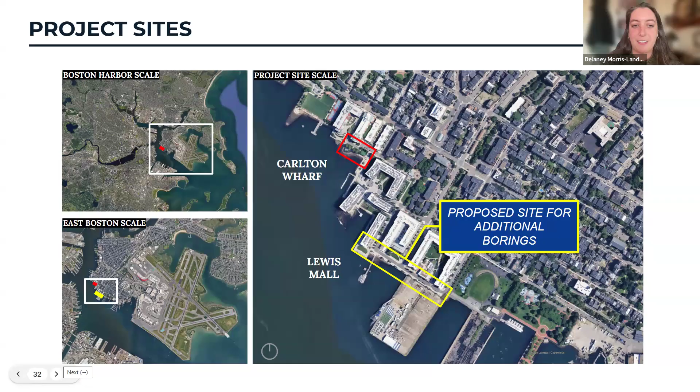Good evening, Commissioners. We are coming to you tonight to ask for the NOI for our additional borings at the Lewis Mall site. We previously have come to the Commission for borings, and these are 2 additional ones in the yellow box you can see on this image here.

This project at Lewis Mall and Carlton Wharf are both for near-term flood pathways into the East Boston neighborhood. There is an additional entry point along the Border Street area, and the convergence of these pathways poses immediate risk to critical infrastructure such as the Sumner Tunnel and the MBTA Blue Line.

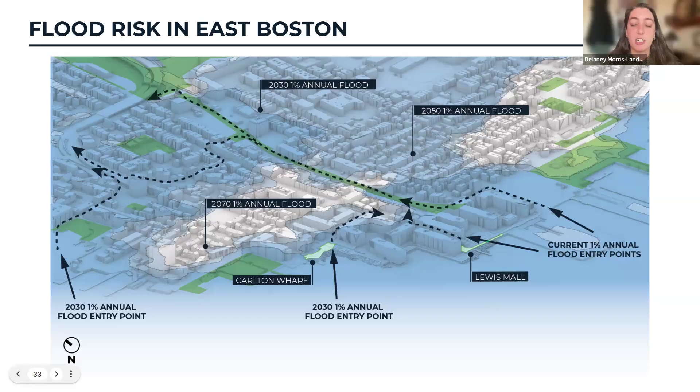This area sees a 10-foot tidal swing every day, twice a day, which is very unique to this area of the world. When this land was filled and created, it was done so when the land was higher than these tides, before we understood storm surge and sea level rise. Recently, storm surge and high tides have caused flooding in this area. If you live in this neighborhood, you've likely seen this flooding during big storms on Lewis Street. This is an immediate issue, but we want the solution to also have benefit in the future.

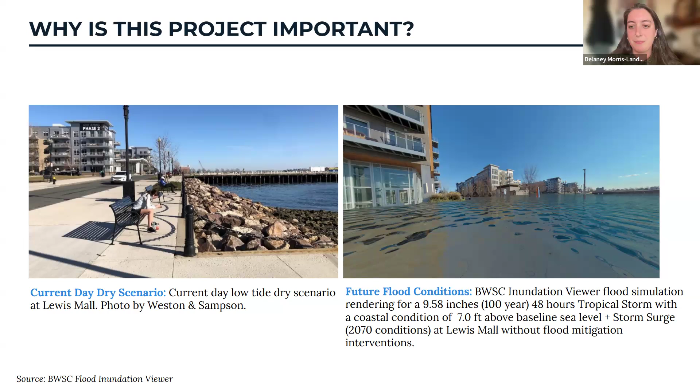To further set the context, we have a variety of considerations shaping the work, including adjacent private property owners such as the Mark, Clipper Ship, and East Pier, all set on a landscape of previous waterfront industrial land created from fill in the 1800s and 1900s. Running below Lewis Street is the Blue Line Tunnel, which means we need to think about how much weight can be added. There is also a water taxi service to downtown, and finally, most of the storm drains from the neighborhood connect to pipes and outfalls that run underground through the project area and outlet into the harbor here.

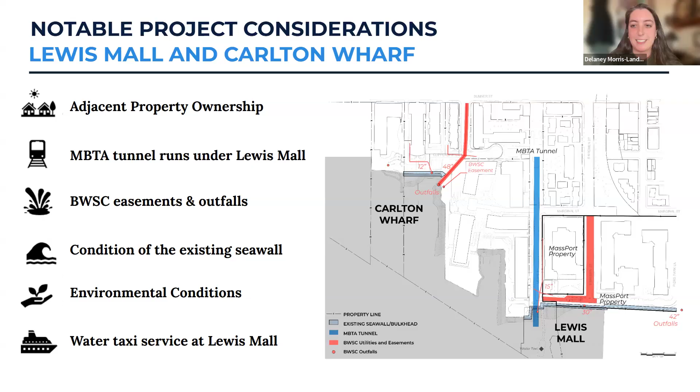So really quickly, we can go through a couple of existing conditions. As mentioned earlier, here is a photo of coastal flooding from 2022. This photo is real, and in the photo on the right, you can look heading east along East Pier Drive, where the elevation rises up and then dips back down again before meeting Piers Park Phase 2.

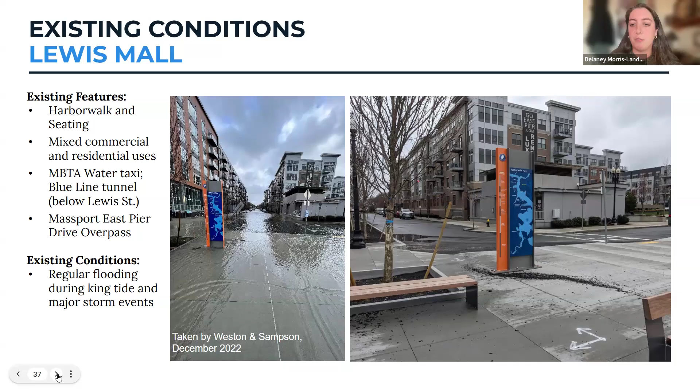Looking at the aerial at low tide, you can see the overpass area we are looking to target for the additional borings in the top right corner. The overpass consists of a pile-supported concrete deck integrated with an internal pile-supported concrete bulkhead wall. This bulkhead wall was backfilled to create roadway access, effectively closing off tidal flow to the interior area. Stone revetment, riprap, was placed along the base of the bulkhead to provide scour protection.

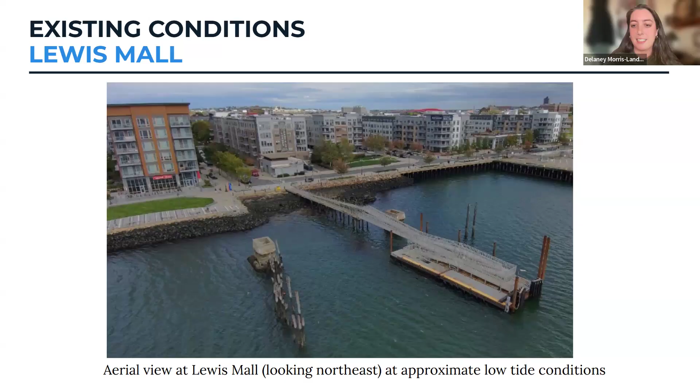This area and Carlton Wharf have very large tidal swings, as mentioned earlier, with very high and low tides. Currently, when a storm occurs at high tide, water is seen overtopping the edges of the harbor walk.

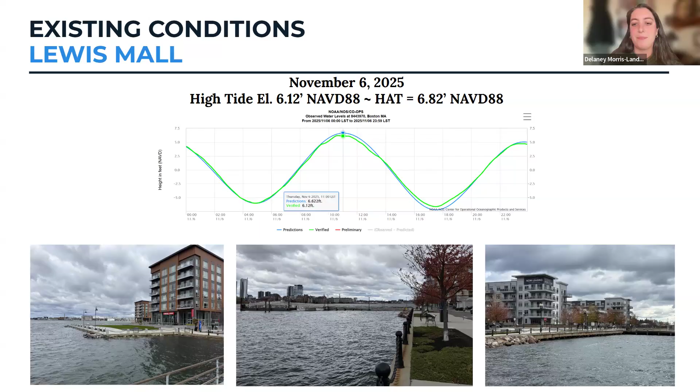The proposed additional borings at Lewis Mall along East Pier Drive overpass are required to advance the project design. We need to get a better understanding of the structural concerns about the soil beneath the water if building on the overpass, as well as the state of the fill. Now I will pass it to my colleagues at Weston and Sampson to speak on behalf of the borings.

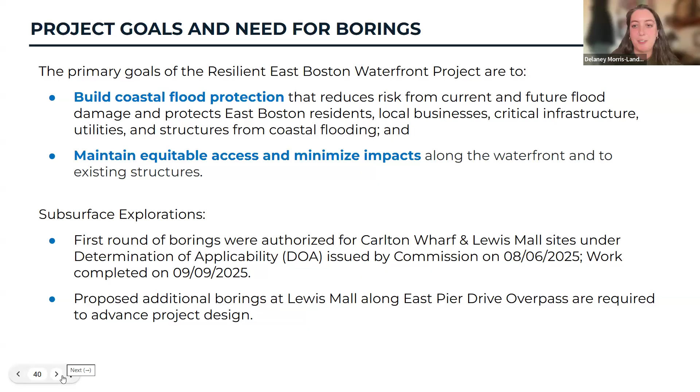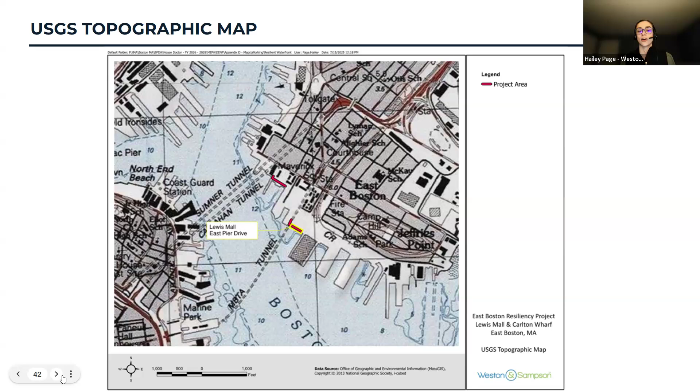From here, as mentioned, this project is located within land subject to coastal storm flowage, which is associated with the flood zone. Within the site, there's a zone VE located at elevation 13, NAVD 88, and there also is a zone AE, which is located at elevation 12, NAVD 88.

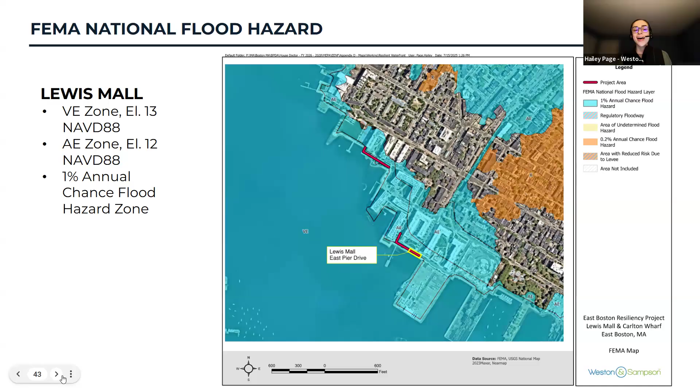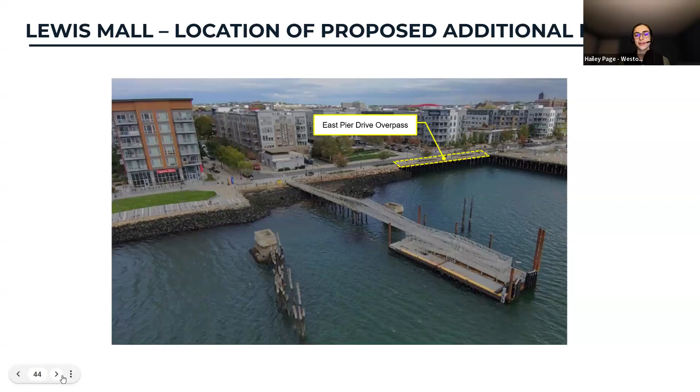These 2 subsurface borings will be performed through the overpass deck along East Pier Drive. These borings will be located both within land subject to coastal storm flowage and within land under ocean. Appropriate sedimentation and erosion controls will be placed around each boring during the extent of the work and removed upon completion. Following the advancement of each boring, the boreholes will be restored to pre-existing conditions to the best extent practicable, depending on whether they're located within concrete areas or within the planters.

It is proposed that the borings take place within the planters, but if there are reasons where they're unable, you'll see on the plans we show a little bit later that we also propose alternative locations if needed, due to different dig safe identifications, or if there's any restrictions for the boreholes to be able to get through.

The boreholes will be backfilled with the soil cuttings as much as possible, and any excess soil that cannot be placed back down in the borehole will be drummed and stored separately in designated areas provided by the City of Boston, and disposed of in accordance with all local, state, and federal regulations.

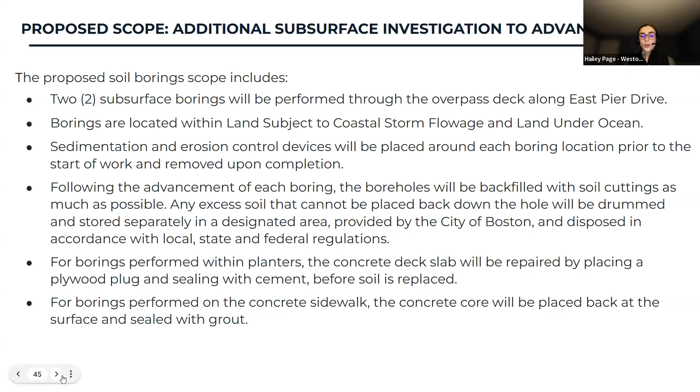Okay, let's move ahead to the next slide, please. Speaking specifically to impacts, our impacts calculated are for both the proposed boring location and alternative, just to be conservative here. So we are proposing 0.8 square feet of temporary impact to land under ocean. This is associated just with the boreholes to get down into the sediments.

And then within land subject to coastal storm flowage, we're proposing 36 square feet of temporary impact. This impact area is a little bit larger due to the proposed erosion and sediment controls. All impacts will be temporary in nature, as I mentioned previously, and restored to the best extent practicable to pre-construction conditions. There will be no impacts to the 25-foot waterfront area, coastal beach, or coastal bank.

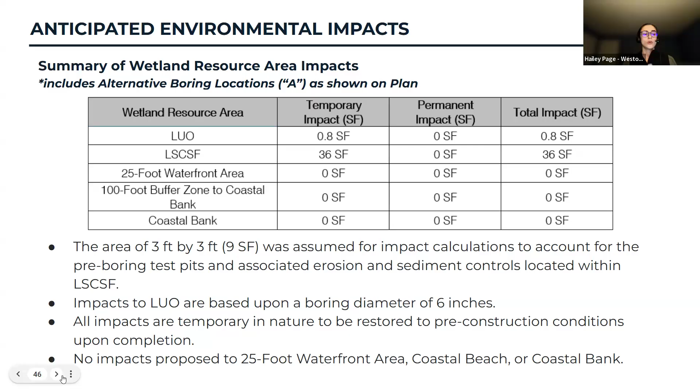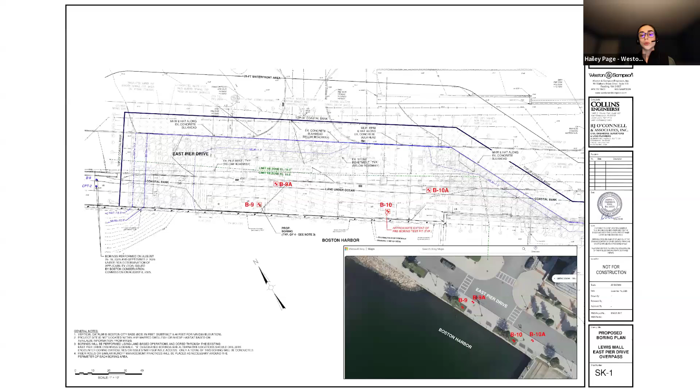Move ahead to the next slide, please. So just quickly throwing up this plan that I was referring to, you see that there are borings B9 and B10 along with B9A and B10A. The borings labeled with the A at the end are the alternative locations, if the proposed landscaped areas are not accessible. Please go ahead to the next slide.

And that's all we have at this point. I'll pass it back over to the commission for any questions they may have.

Great, thank you Hailey. Okay, I just have a couple quick ones here. First of all, want to thank you—when you talked of impacts, the 36 square feet, you included the soil erosion controls. Yep. Usually we don't see that, so I appreciate the transparency there.

Of course. As far as excess soil that is not appropriate to be backfilled, are you expecting any contaminated soils in that area, or is it just a precaution? It's, I believe, just a precaution with the state, local, and federal requirements. We want to make sure that if there are extra materials, we're handling them properly and testing them as applicable. Great, okay, thank you.

And then I have a question for Delaney regarding the wild or extreme tidal flows here. Why is that, and how does that compare to other parts of the waterfront? It is the same really across the waterfront—Boston sees that same 10-foot tidal swing. Okay, that makes more sense. I was wondering if that was idiosyncratic over there.

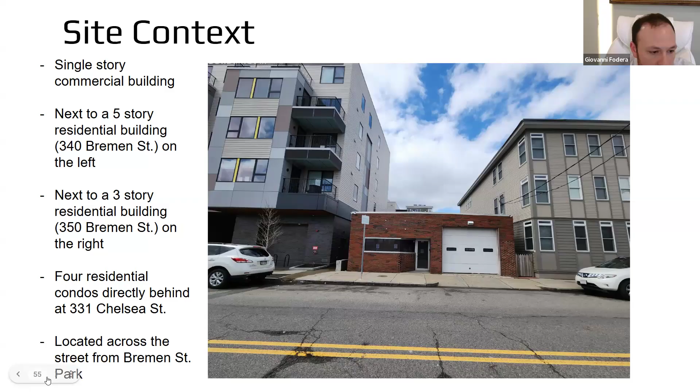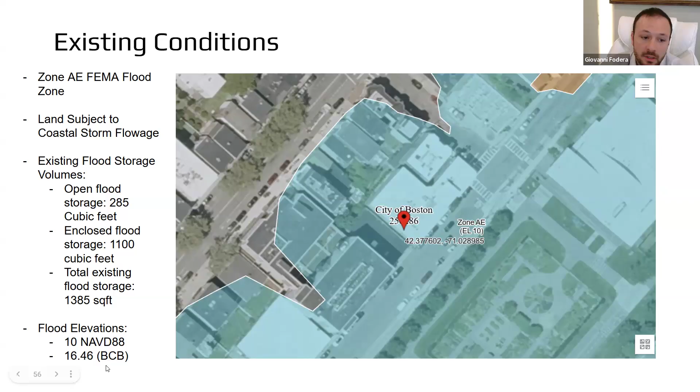The project has been designed to comply with floodplain regulations and improve resiliency at the site. The proposed building elevates habitable space well above applicable flood elevations, and the design ensures flood storage is not displaced and flood flows are not obstructed. In addition, utilities and critical systems are designed with flood resilience in mind.

We can scroll to the next page. From a stormwater perspective, the project represents an improvement over existing conditions. Currently runoff from the site is unmanaged, but under proposed conditions runoff will be captured and treated through a stormwater management system designed in accordance with Massachusetts stormwater standards and local regulations. The system is designed to improve water quality and promote groundwater recharge. We have obtained project approval from the Boston Water and Sewer Commission.

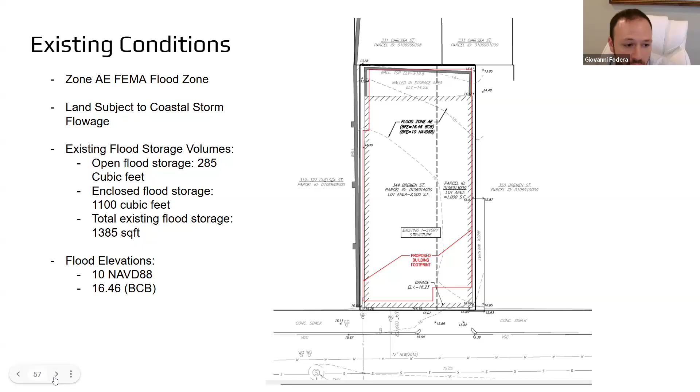Yeah, so it's about over 10 feet above the flood elevation. Flood elevation is 16.46 as shown here on this slide. The utilities will be elevated at least 5.5 feet above the garage elevation. Garage elevation is going to be at elevation 16, so the utilities will be elevated at elevation 21 and a half above the garage floor.

Great. So the ground floor is the garage, so no chance that could be converted to living space. So that's good.

I'll let Commissioners Linné and Wilson talk about the landscaping. As far as I know you got approval from BWSC, so what's your infiltration value here? Are you infiltrating 1 inch? Correct, 1 inch, multiplied by the impervious area on site.

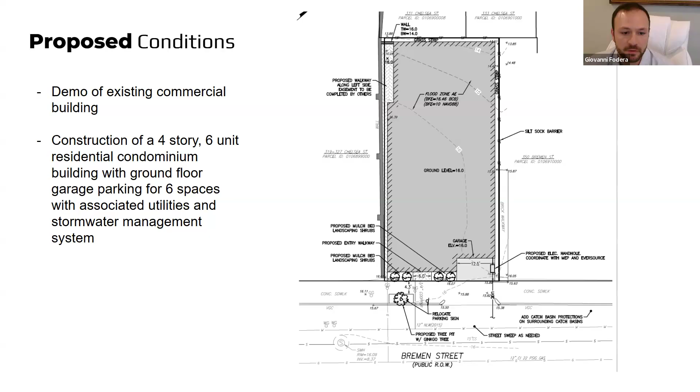Okay, and I see in the notes here that you're going to be putting in light colored materials on the roof. Correct. Okay, I think that's it for me. Thank you for entertaining my questions.

Eleanor, what do you have on this? Thank you. I think the only outstanding question we had was related to the floodplain administrator and whether this project has been reviewed by him.

Other than that, the recommendations we noted include a special condition that the waste on site is disposed of properly prior to construction, that an invasive management plan is provided prior to construction for the knotweed, and a special condition that the roof be light colored materials, which I think should all have been covered in the presentation and discussion since then.

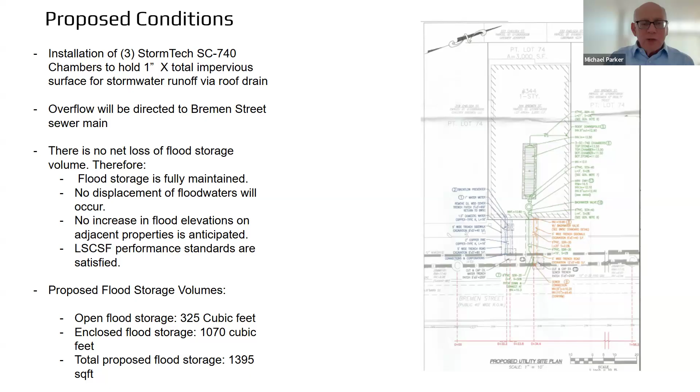I just wanted to point out, I think the Japanese knotweed that'll be in the new building footprint, right? So that disposal is considered hazardous waste and needs to be dealt with properly.

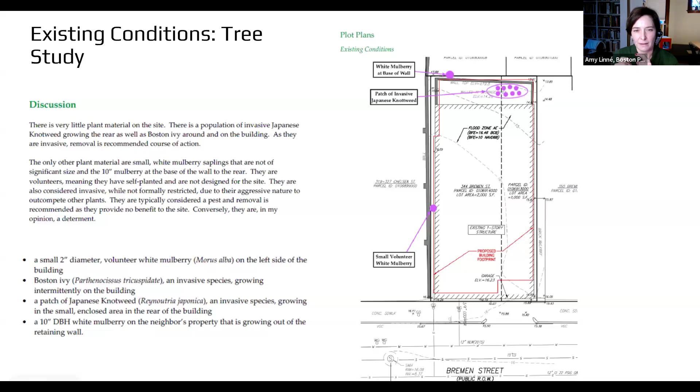I appreciate the street tree addition. I know that comment came out of the Parks Commission, and I saw the details included. I just wanted to make sure that in that detail, or maybe on the next slide with the plan view showing the street trees, the detail calls for sand-based structural soil, so making sure that's described in the plan view, presumably from the width of the tree pit connecting to where those shrubs are.

And I wondered about the watering of that tree, if this building is intended to be condos or apartments, rentals, and if that's part of the property management. Sorry, I'm just giving you all my questions at once. And then last, what the shrub species are, if that's been selected.

Yeah, so I can confirm these will be 6 residential condos. So if it's something we can put as a responsibility with the HOA, I'm sure that's not a problem to water and keep alive. Yeah, as it outlines in that detail, it's really the first couple of years that are critical for those bags to be filled.

For shrubs, Dan, do you care to add anything, any specific species that could work here? Definitely recommend not arborvitaes. I'd have to look at the plans for the elevation to see how big we want them to get, but anything from Japanese holly, maybe, or something that's going to be evergreen but easily managed based on the size constraints there.

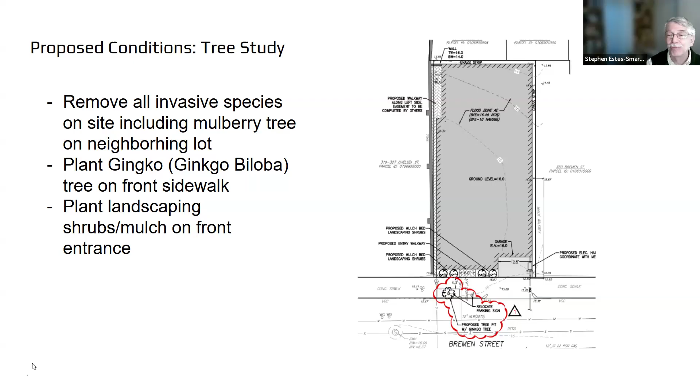Well, it's a foot wide strip, so it's pretty narrow, but we're trying to add as much greenery on the site as we can. Whatever areas we can fit loam and seed is what we're trying to achieve. But a foot wide, you're not going to be able to mow it - someone's going to be weed whacking it. I'm just looking at this photo here.

It looks like your neighbor's got some sort of pavers and gravel adjacent to their building. We are open to using a gravel material as well, just a pervious material - that's what we're trying to achieve here. So if that's preferred - I'm just asking for realism in the end - yeah, if you put loam and seed, it'll just be mud eventually.

Okay, looking at Commissioner Linné to see if she's nodding her head about this little dark slot. Yeah, I think that's practical, to not try to do a lawn there. Pervious is good, and gravel's probably more pervious than trampled soil. We are absolutely open to having a gravel strip instead of a lawn strip. Absolutely, yeah.

You've got pretty much the whole site occupied. That's it for me. Great, thank you. Good thought. Commissioner Herbst?

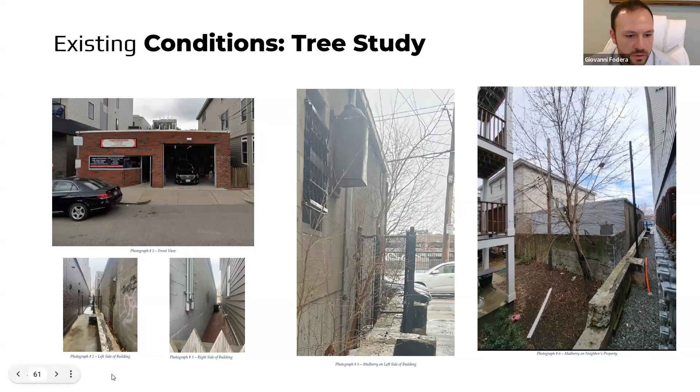Well, I just wanted to clarify that, because I don't think it's an issue in the end, but the building will expand by the size of that currently open space contained by a building, right? It's going to go from pervious to impervious.

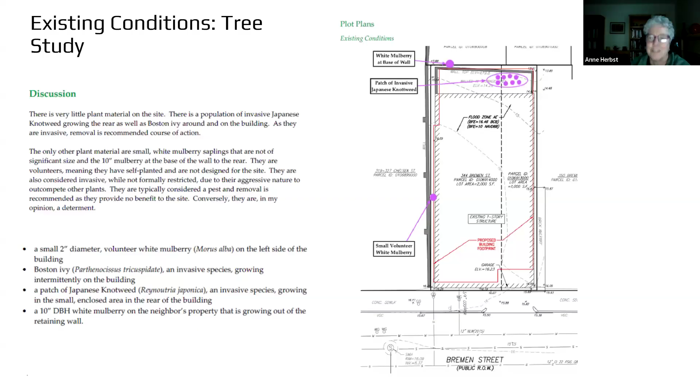I just wanted to clarify between flood storage and pervious and impervious coverage, just the size of the building itself, as Chair Parker had asked, and I wanted to be clear that it is growing. Yes. That's it. Thank you.

Elena, any raised hands? Emails? I do not see any raised hands. Nothing in the chat, nothing in the inbox either.

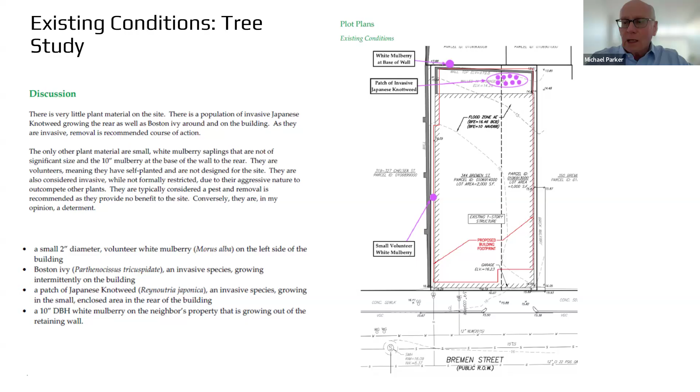Okay, so I have collected a fair amount of special conditions here, and I will take a stab at them, and I will readily accept help from fellow commissioners and staff to make sure I didn't miss anything. First, I would entertain a motion to issue an order of conditions with the following special conditions and close the hearing. First, Brian, this is making sure that the condominium association that is formed is aware of the maintenance obligations and the order of conditions itself going forward.

That would be one of our special conditions. Another condition I have here is that the landscaping plan be submitted to staff prior to construction for approval by a subcommittee of the commission, probably Commissioners Linne and Wilson. Light colored roof materials would be another special condition.

Brian, we talked about this. Should you happen upon, and I hope you don't, any hazardous materials that require remediation or getting an LSP involved, let staff know what's going on at the site. So if it's a report that you have, that would be submitted to staff.

An invasive management plan, Dan, I think we talked about that. Cleaning of the debris, we'd like to see that done sooner rather than later. There's some debris at the site.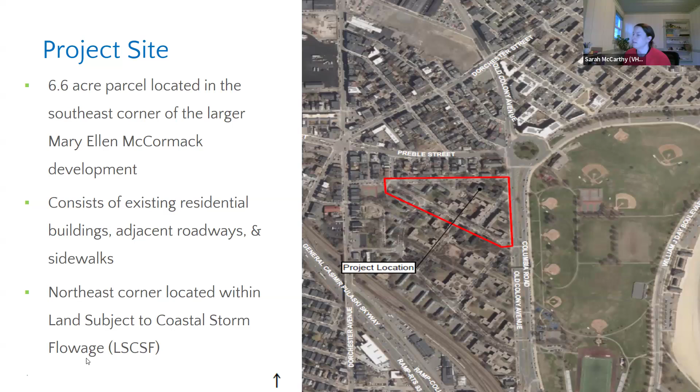Right now, the existing parcel is 6.6 acres. It consists of 5 existing residential buildings, adjacent roadways, and sidewalks. And if you don't mind going to the next slide, the northeast corner, as you noted, is located within the land subject to coastal storm flowage. The construction of the buildings themselves is completely outside the floodplain.

The work we are proposing within the LSCSF as part of this project is demolishing the existing buildings. There's a portion of the roadway reconstruction into Devine Way. And then most of the area within the floodplain is going to be used as contractor staging and stockpiling areas, which I'll show on the plans as well. In total, it's just under 30,000 square feet of impact, again in support of the construction of the 2 new buildings. Next slide.

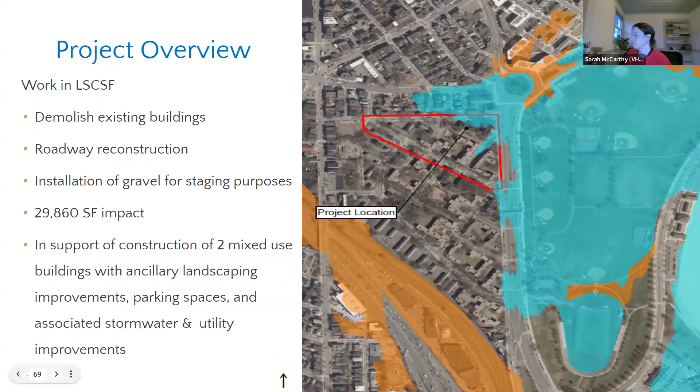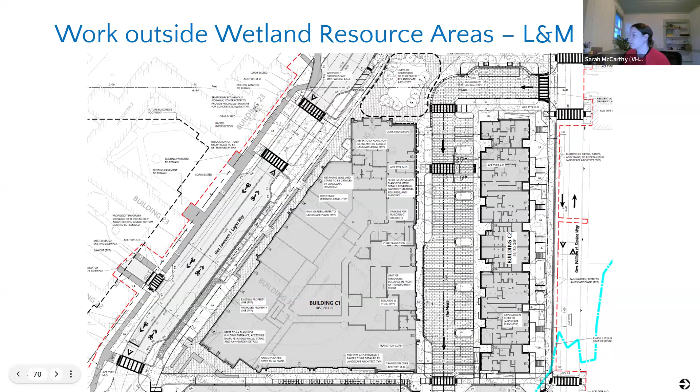But you can see on the bottom right corner of this plan, the floodplain is just kind of encroaching where those accessible curb ramps are proposed. And if you go to the next slide...

So 5 existing buildings are demolished in support of this project. There's an existing parking lot that will likely remain and be used for contractor parking. And then the remainder of the area for material stockpiling, staging areas, etc. Next slide.

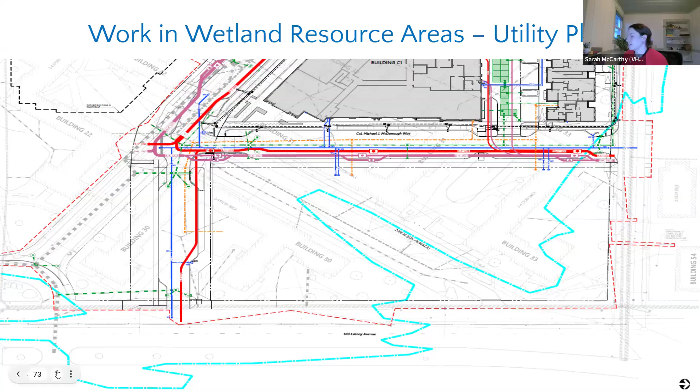Okay, great. Thank you. So, just to be clear, what work is being done? So there's not going to be a construction of any buildings yet. This is all demolition, correct? Yes, correct. Grading of the site.

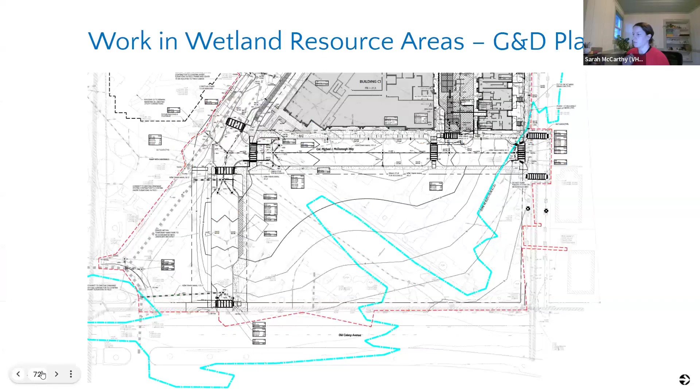Okay, if you don't mind going back to the site plan, just two more with the layout. So within the gray clouded area that's shown here, there will be two future buildings that are proposed, which is the following phase. That'll be a separate NOI filing with the Concom that we'll come back with.

Got it. Okay. Could you just quickly talk about erosion control measures here? You're going to be doing a lot of excavation, dewatering. What's going on there? Yeah, absolutely.

We'll have erosion control installed at all the downstream ends. Again, there's a fair amount of utility demolition, so all the existing stormwater within the limit of work for the project and building services will be demolished. We do have an approved cut and cap plan with the Boston Water and Sewer Commission, and we're anticipating filing for site plan approval imminently. But any existing stormwater infrastructure to remain will be protected for the full length of construction.

Okay. Again, very similar to the building A phase, the contractor's been working closely with the city to make sure that all the erosion control is installed correctly.

Okay, so I guess I think you said this. So there'll be filtration for the stormwater drains, so we won't have all sorts of silt and stuff going down the drains, right? Correct. Silt sacks will be installed within the existing and proposed catch basins where applicable. Perfect. Okay, good. Thank you.

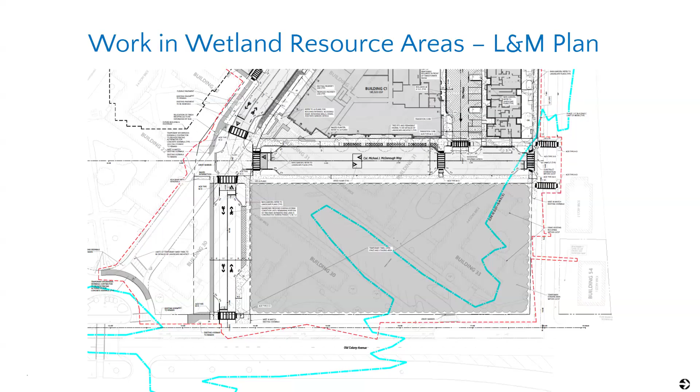Commissioner Wilson, by the way, great recall on 282 Bremen last hearing. That was impressive. I went over there to wait rather than the cell phone lot for flights to land, and the kids played in the parking lot. It's like 10,000 times better. Fantastic, I deeply enjoyed being over in the neighborhood. Well, we deeply appreciate your institutional knowledge. That's valuable. If they can replicate that at our 355, that'd be fantastic, or at least some of it.

Commissioner Estes Smargiassi? I don't have anything on this one. Thank you. Okay, Commissioner Herbst?

Just a question about the erosion and sediment control. Your narrative talked about placing gravel down, but then your erosion and sediment control talks about seeding and other things. So I'm wondering, are you doing those things, or what are you doing on the surface that's going to be open for quite some time? So really the only areas that are going to be open, and that can be worked through with the staging plan as well, is over to the right within the land subject to coastal storm flowage.

There's a small portion of the building that's going to be demolished within the floodplain. So when that's fully demolished, that will likely be replaced with gravel during construction. That's really the only area we'll see that for a longer term. Realistically, until they have to start removing some of the sidewalks for access, the landscape areas will be maintained to the best of their ability.

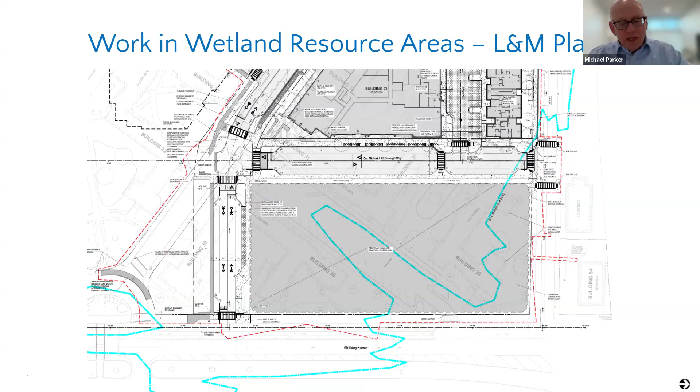Okay, next item on the agenda: notice of intent for DEP file number 0062112 from Green International Affiliates, Inc., on behalf of the Massachusetts Water Resources Authority, also known as MWRA, for the proposed repairs to the seawall, pedestrian infrastructure, and sinkhole, as well as drainage and landscape improvements at 33 Tafts Avenue, Deer Island. Resource areas: land subject to coastal storm flowage and 100-foot buffer to coastal bank.

Commissioner Smargiassi, do you need to recuse yourself? He's gone already.

Elena, Commissioner Smargiassi - camera off, mic off. Okay, very proactive, fantastic. That's sort of like your mic drop a minute ago - exactly, I just completely disappear. That's what everyone's doing to me tonight. Okay, who's here on behalf of the proponent?

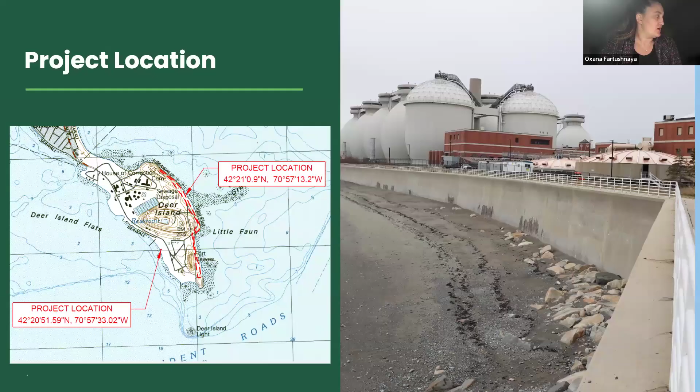This is the key plan, basically showing where the project is located. It's the northeastern part of the seawall, and we also have a small portion on the western side of the island, which I will get back to you about later.

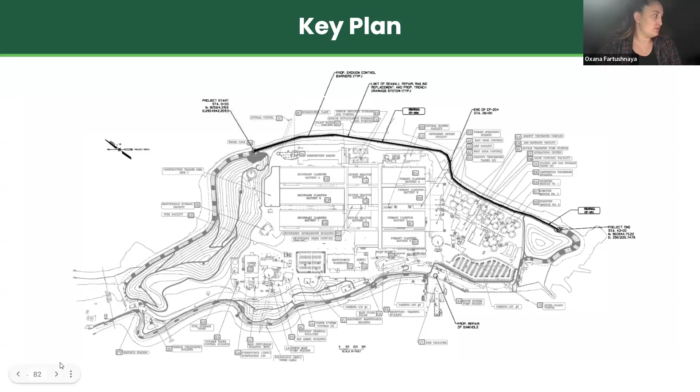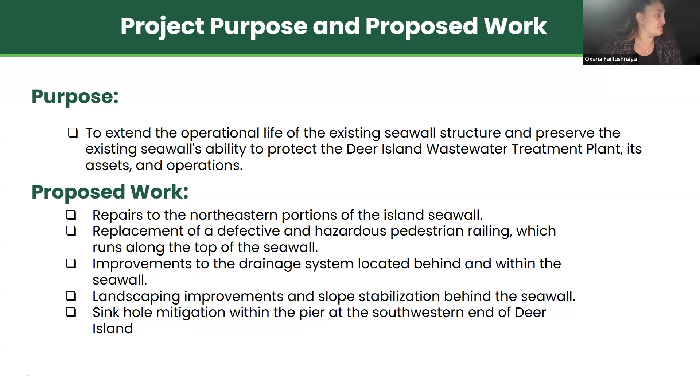I'm pretty much done covering that, but we are here to show you the impacts from the proposed improvements to the seawall, and the landscape and drainage improvements to extend its lifetime, as well as the sinkhole mitigation on the other side of the island, which will be shown in the next slides.

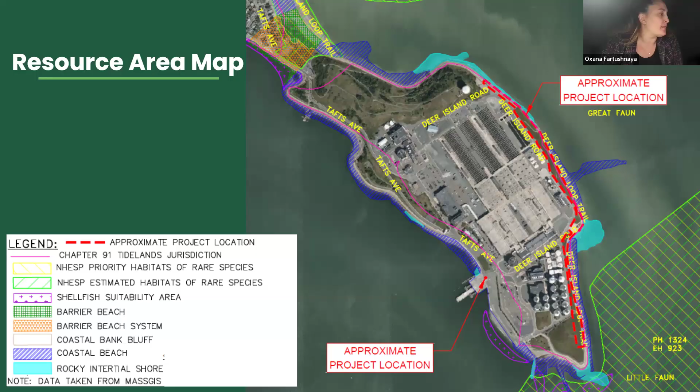This is our FEMA map. Basically that's our main impact here to the resource area.

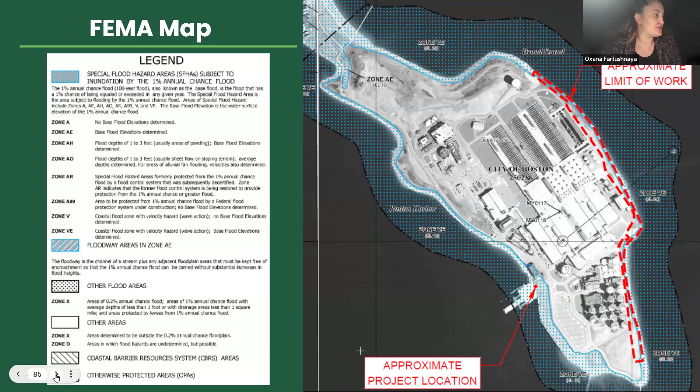We included a bunch of photos here because that's easier to understand what this project is about. We're not really doing any work on the seaward side of the seawall. The project is about the repairs to the face of the seawall, which is basically supporting the entire facility and the island.

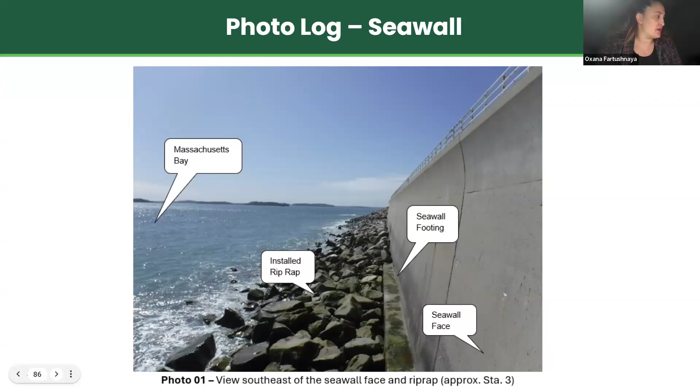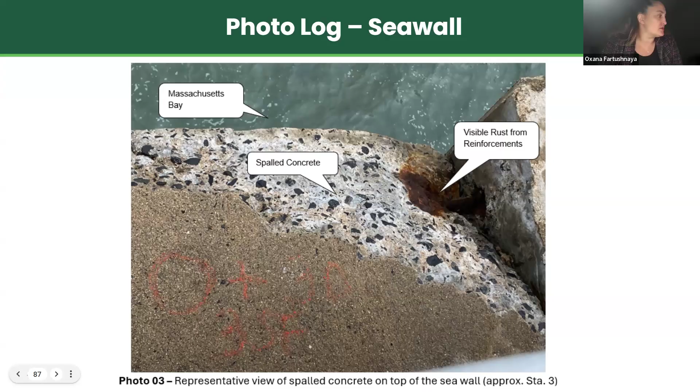Here you can see there are a lot of issues going on right now with the seawall - there's spalled concrete, visible rust issues, and exposed and rusted steel reinforcement in some parts.

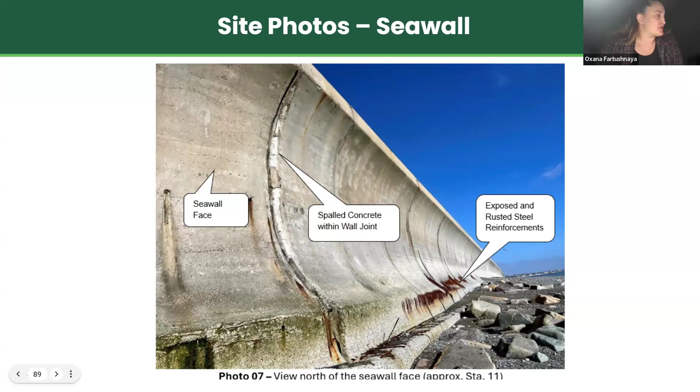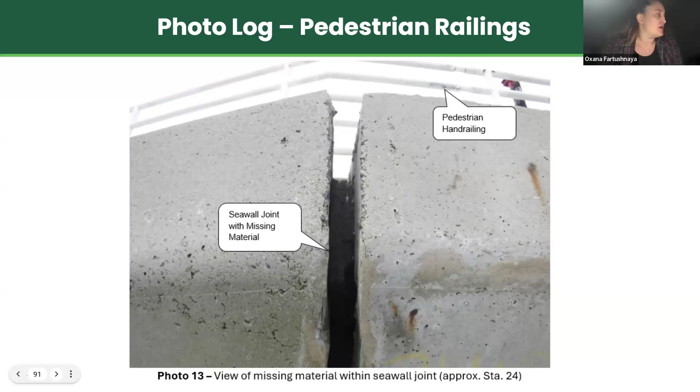I'm not going to describe each one of them, you can basically see them. This whole project is not about replacing the seawall, it's about addressing the current issues that we have with it, and we will be replacing the hand railings, which you can see on this slide.

I'm going to expand on that a little more. The seawall pictures you've seen so far show a lot of issues, and the project is about addressing these issues by repairing.

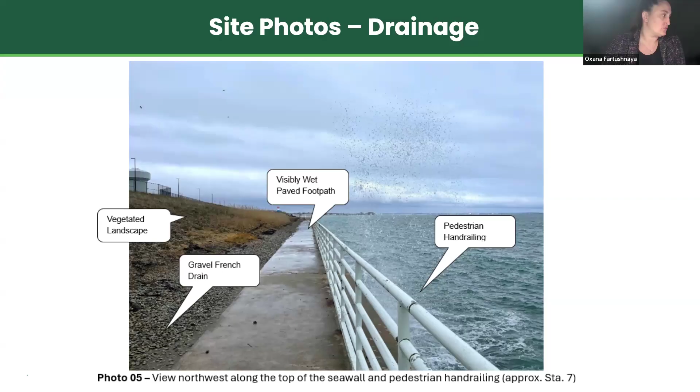You can scroll through - this basically shows again the issues with the drainage happening on site.

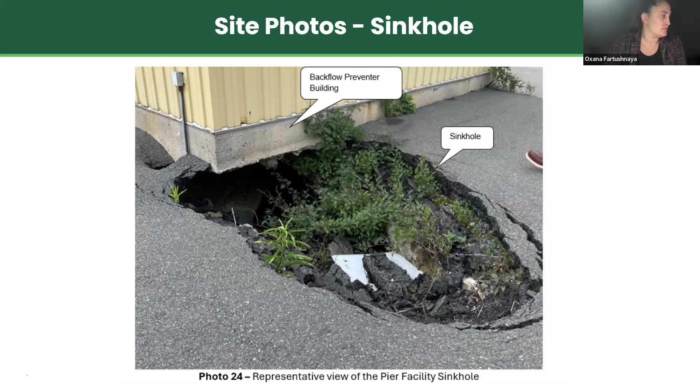As I said, all of our impacts are limited to land subject to coastal storm flowage and the 100-foot buffer zone. With regards to land subject to coastal storm flowage, the improvements to the drainage system currently in place will actually result in a net cut of 170 cubic yards. So what you see here is all temporary impacts, and the real impact will result in net cut. There will be no net fill, no new impervious surface, nothing will be changed with regards to drainage that would cause more impacts to that area.

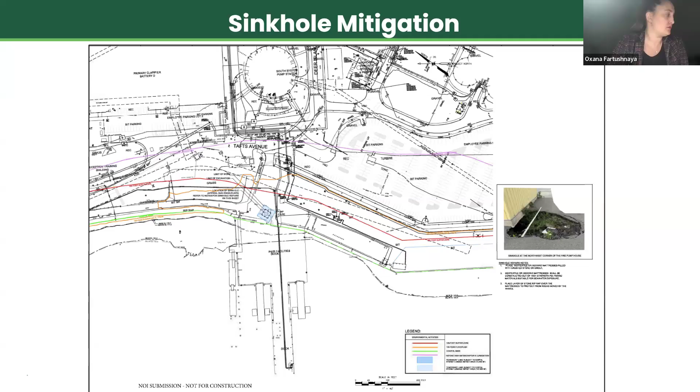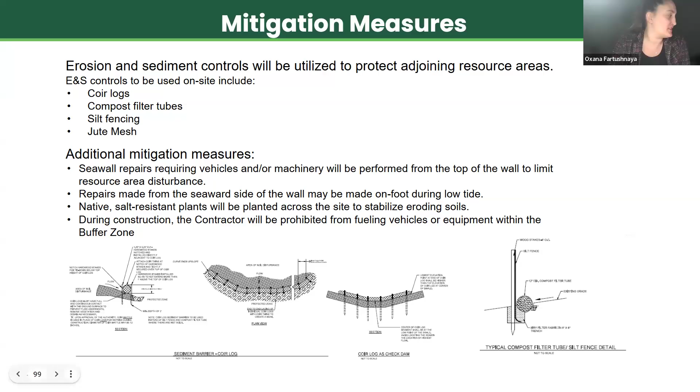This slide shows that there will be proper mitigation measures and erosion control measures installed along the excavation areas related to the proposed work. I'm not going to go over it in too much detail unless somebody wants to ask questions, but that's the slide about that.

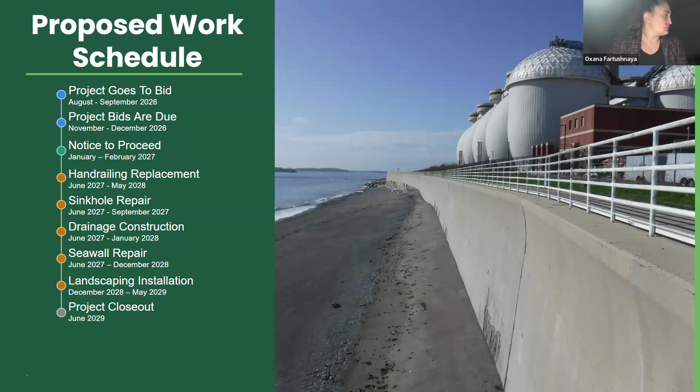Yes, so this is the project schedule. We are ready for questions. Here with me we have MWRA staff available to answer questions, and I also have some engineers available to answer specific questions that I may not be able to answer.

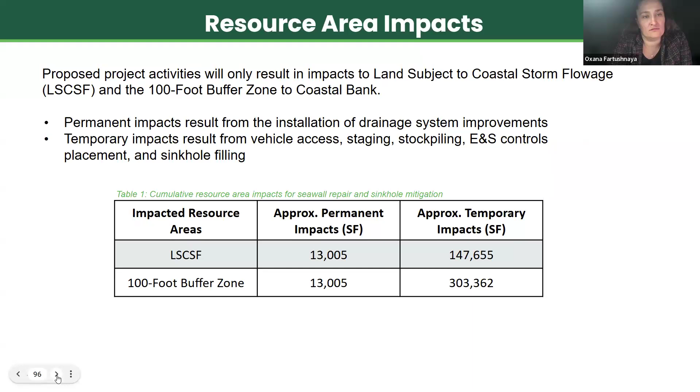This particular area is being used by the public as a walkway, because people are allowed to go around and use it as a park, like open space and waterway access. So we basically want to make sure that the seawall is supported and able to be maintained for the next 50 years. That's the intent of this project.

Also, the existing weep holes will be cleaned as part of this project. Overall, the project aims to improve the drainage so that you won't see standing water there at any point during storm events, or when the wave action is high. This will help maintain the structure for many more years instead of replacing it, which would be a costly and very difficult project.

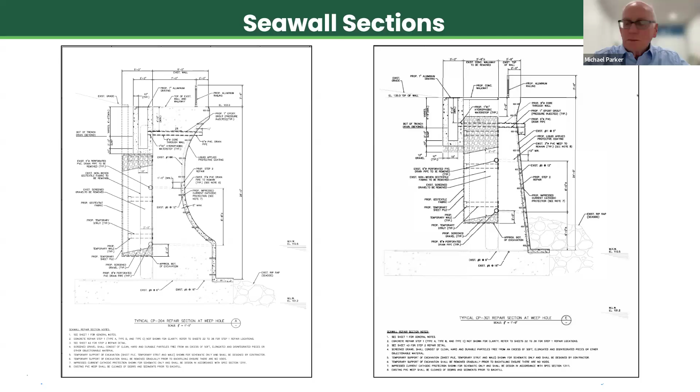Okay, Elena, anything else? Nothing else, that was it. Okay, Commissioner Linné?

I don't know that I have a lot of questions, but I wanted to say I can imagine this is a tough environment for plants and for materials, so I appreciate the plant list having a lot of salt tolerant species, and the new railing, aluminum. Is that powder coated?

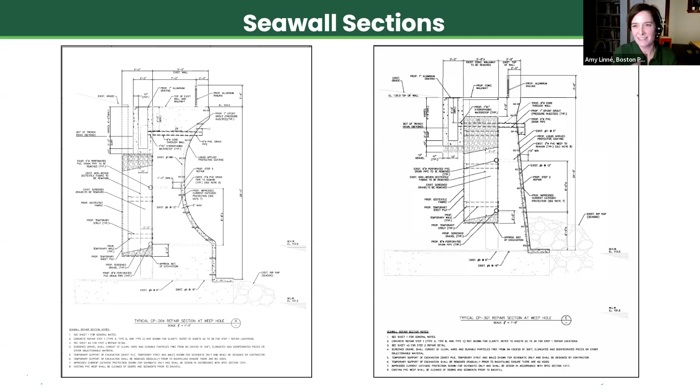Thanks, great, thank you. Commissioner Wilson? Yeah, echoing Commissioner Linné's comments, it's a tough environment, but it's stark and it's beautiful and everything like that.

I guess one question I did have was, I couldn't zoom in as well as I wanted to, but for the areas adjacent to the path, inboard of the wall, those are frequently walked upon or biked on in order to create enough passing area. There's gravel there, it's compacted, and there's obviously erosional things that go along with that. In terms of what you're proposing there, what do you see as its level of robustness or monitoring?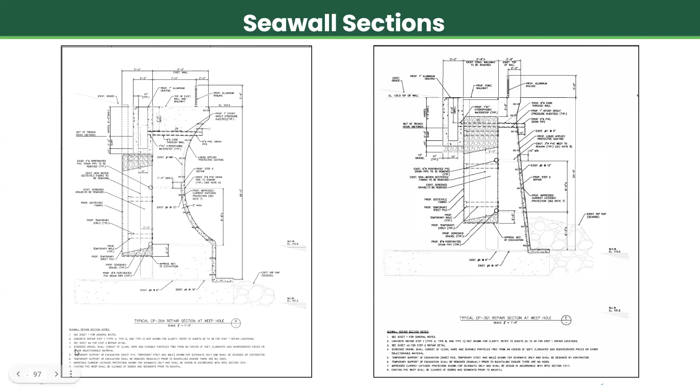Are you talking about the slopes next to the gravel French drain? Yes, it's not everywhere, but it is part of this project. Some slopes, not this one particularly, but the one further along where we have a steeper slope that is being hit by wave action a lot - that one we will have salt resistant vegetation, which was actually noted by Anne, I believe, as we are proposing slope stabilization. So mainly it's going to be regrading and then slope stabilization and vegetation planted with salt resistant plantings shown in the plans included as part of this NOI. But it's not around the whole island, the entire limit of work, but it is within the areas being hit pretty heavily by wave action.

Yeah, totally understand. And I guess underneath there you can see some of the geotextile exposed, it looks like. Is there an opportunity for something like GeoGrid, or - I don't know, Commissioner Lee, you probably know the latest and greatest in this type of stuff - but just to try to keep things from migrating and eroding quite as fast.

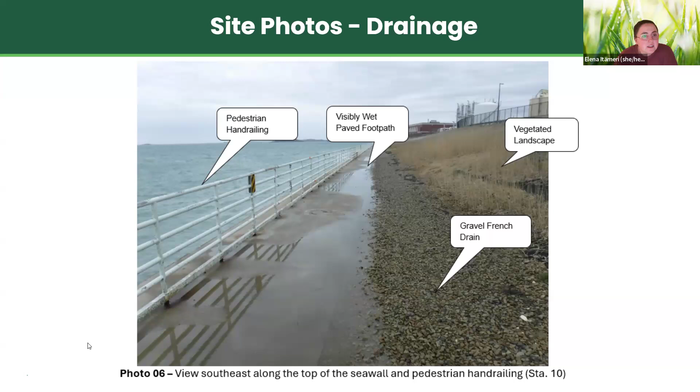Okay, so with that, I would entertain a motion to close the hearing and issue the order of conditions, with a special condition that prior to construction, the work plan that includes the containment measures that will be taken be submitted to staff, with staff's comment and approval on the containment measures.

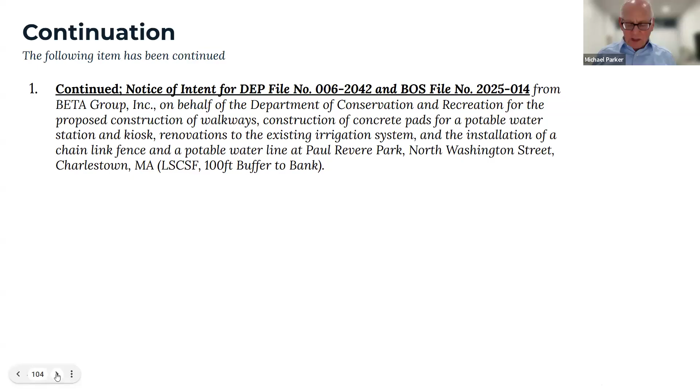We will now begin our regular meeting, and the first item on the agenda is a request for a certificate of compliance for DEP file number 006-2014 and Boston file number 2024-034 from Tighe and Bond Inc. on behalf of Eversource Energy, to conduct 2 soil borings, 10 test pits, and 17 test trenches along Alfred Street right-of-way in Charlestown.

Staff conducted a site visit on March 19th. We confirmed that the project site had been restored to basically the conditions they were in before work was done. The test pits were completed in October 2025. They did note there are still some test pits being conducted in Everett; however, those are both outside of Boston and outside of LSCSF, so not jurisdictional in either capacity for us. Based on that, we would recommend issuing a complete certificate of compliance with perpetual maintenance condition number 55.

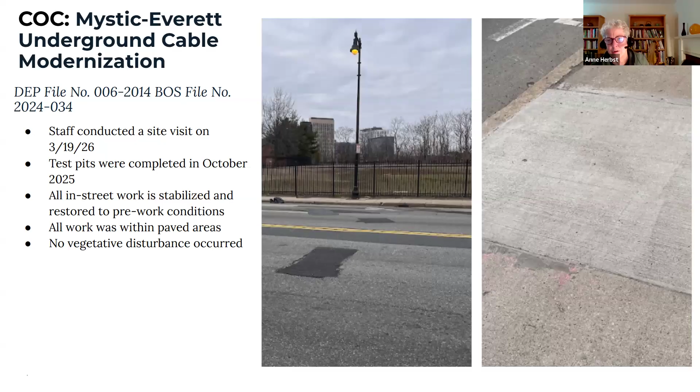I think that would be fine as well. I don't even think they have the right to manage snow there, so it's not their property. Good point, I didn't understand that. Yeah, I think we'd have to forego that one.

Thank you, Commissioner Herbst. Okay, with that, I'll entertain a motion to issue a certificate of compliance for DEP file number 006-2014 and Boston file number 2024-034. So moved. Commissioner Linay, aye. Commissioner Wilson, aye. Commissioner Estes-Margiazzi, aye. Commissioner Herbst, aye. And I vote aye. That carries 5-0.

Thank you, and Elena, we certainly appreciate your zealousness. I think this was a great example of a condition that made it into the order and was maybe covering too many bases. I think we'll let the State Highway Department take care of that. I also recall I got particularly crispy about this one, so maybe you were channeling my energy on it. Appreciate it. We're just being very careful.

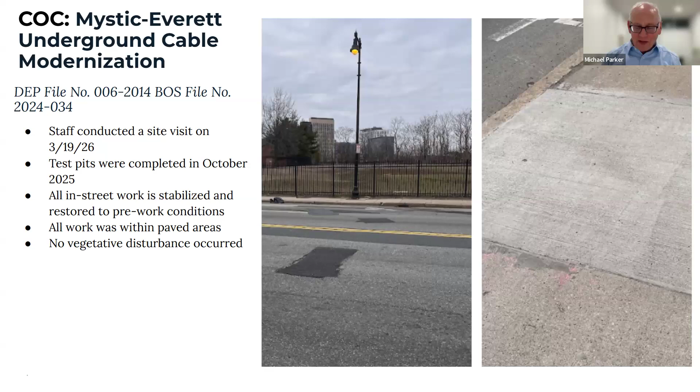Okay, next item is a request for a certificate of compliance for DEP file number 006-1763 and Boston file number 2021-001 from Childs Engineering on behalf of Synergy Services for seawall repairs and foundation rehabilitation at 250 to 253 Summer Street in South Boston. Elena, what do we have on this one?

We conducted a site visit yesterday, March 24th, and the work appeared to have been conducted in accordance with the order, so we would recommend issuing a complete COC. A few things came up: we clarified that no grout bags were used during the work; chinking stones were used to fill the voids instead. The anticipated life of these repairs is about 25 to 50 years, depending on frequency and intensity of storm events, but they do inspect the area approximately every 10 years to see if repairs are needed. We have some perpetual maintenance conditions which are more relevant - numbers 27, 45, and 46.

Just a comment - it seems like, especially in the first few years, you'd want to inspect the seawall more frequently than every 10 years, to see if the repairs took root properly. That seems like a long time to inspect. I agree, but the sense I got from projects along this part of the Harbor Walk is that the area is frequented enough that there might be a formal inspection every 10 years, but as-needed repairs come up and are conducted. So it might be a formality, but people are paying attention in a less formal way. I don't think it's a question of people only looking at it every 10 years.

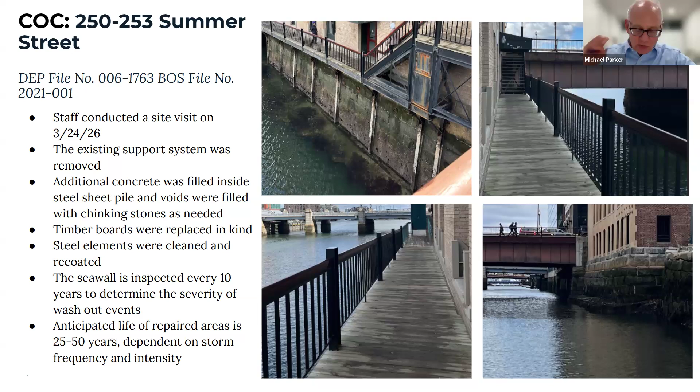Okay, thank you. Any questions from any commissioners? Hearing none, I would entertain a motion to issue a certificate of compliance for DEP file number 006-1763 and Boston file number 2021-001, retaining maintenance conditions 27, 45, and 46. So moved. Second. Thank you. Commissioner Linay, aye. Commissioner Wilson, aye. Commissioner Estes-Margiazzi, aye. Commissioner Herbst, aye. And I vote aye. That carries 5-0. Thank you.

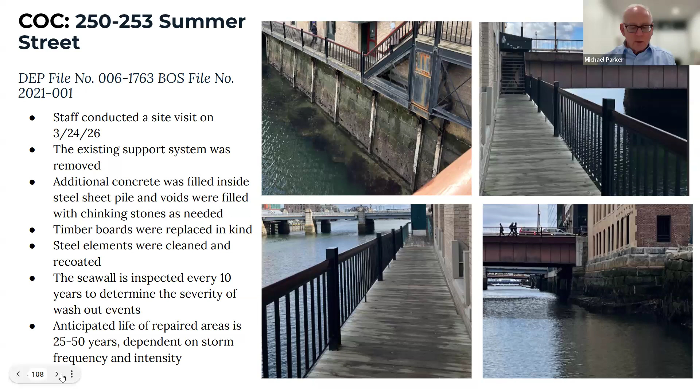Okay, next item on the agenda: request for a certificate of compliance for DEP file number 006-1629 from Weston and Sampson on behalf of the Boston Parks and Recreation Department for improvements to Langone Park and Puopolo Playground, located at 471 Commercial Street and 529 and 543 Commercial Street in the North End. Commissioner Linay, I think you have to recuse yourself. So, Elena, what do we have on this?

We conducted a site visit on March 19th. There were a few design changes made, mainly related to vegetated areas. Originally the plans had included a vegetated area in a strange spot next to the basketball court, and once they started construction, they realized that probably didn't make much sense. So they ended up adding more permeable areas where you see the trees and some of the grass. Everything balanced out to be the same, if not more permeable than what was originally permitted, but that was a minor change that they flagged.

They did also note, and if folks have been out there, you may have noticed this, but because of the design of the harbor walk, there's water, depending on what the tides are doing, going both under and over the harbor walk at times, and that is leading to some warping of the wood used there. Nothing severe enough to require replacements at this point, but it's good to keep in mind for future harbor walk projects we might be permitting.

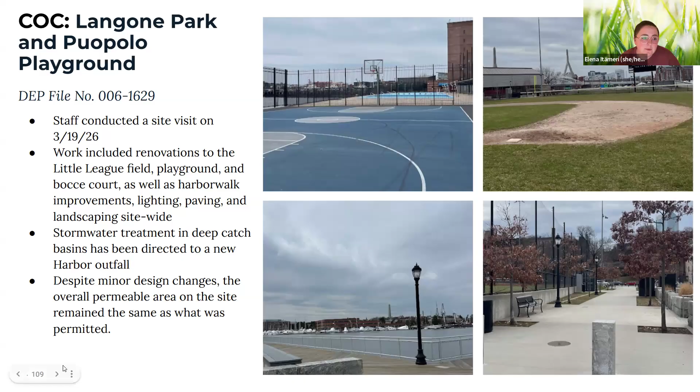That carries 4-0. Okay, Elena, Boston scores is off, right? It is, yeah. We are still waiting on some other items, so we would recommend that the commission hold off on voting on that. Okay, now we're up to administrative updates.

What do you have for us? Yes, so the first update is a request to ratify an enforcement order, which is in the drive folder for the commission's review. For context, this enforcement order would apply to the parcel right next to the area where a lot of trees were cleared, and we have been working with the folks at Chestnut Hill Realty to resolve that. On a site visit we conducted in relation to that enforcement issue, we had noticed some eruv poles which were in the wetland on the adjacent property.

There's been a bit of a delay in taking next steps for this because the other challenge here is that it's not owned by Chestnut Hill Realty, it is DCR property. So basically in our conversations, we have learned that Chestnut Hill Realty initially moved these posts. They did discuss this with the director of the Greater Boston Eruv Corporation, who maintains the eruv that goes around the Greater Boston area. So they had asked them if it would be okay for them to move the posts.

They said that that would be fine. They did not know about the issues related to wetlands or property ownership. DCR, to our knowledge, was not aware of this move either. And those were moved to create that path that is basically the crux of the other enforcement issue.